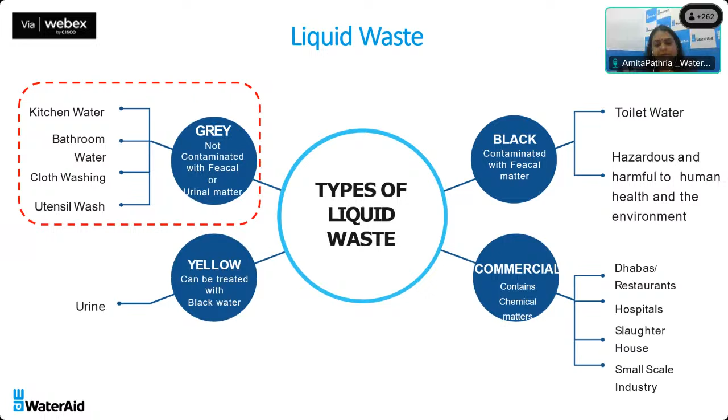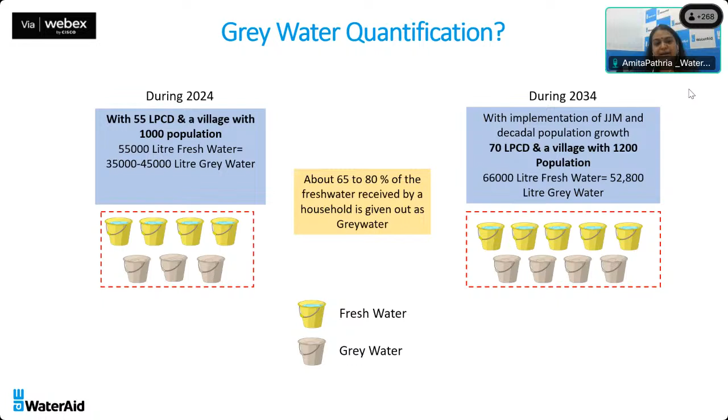Managing liquid waste is crucial for rural sanitation. Population growth and development have reduced freshwater availability and polluted water bodies due to unmanaged wastewater. A holistic approach to wastewater management is needed, turning treated wastewater into a water source. In rural India, grey water and black water are key concerns. Historically, grey water was minimal and manageable at the household level. However, lifestyle changes and increased household activities like bathing and washing inside households have boosted grey water generation. The Jal Jeevan Mission will further increase grey water generation by providing water supply connections to every village and household.

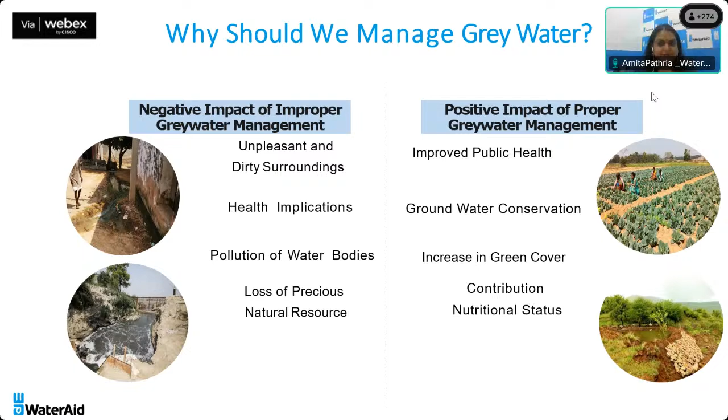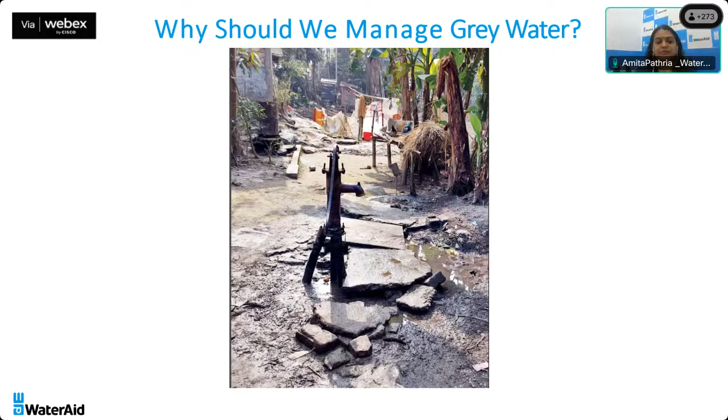Here in this picture, we are looking at a hand pump with a dilapidated platform, and there is water logging there, and an unmanaged situation of grey water is seen, and we see how the environment...

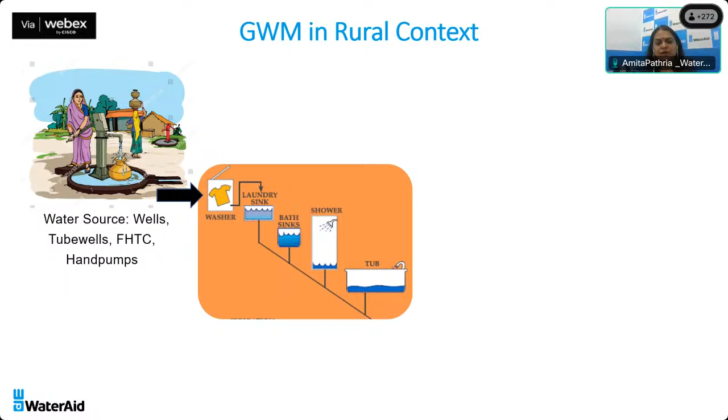So here in the household, these activities happen like laundry, bathing, showering, and kitchen activities. And this water is discharged into either natural water bodies or the environment, polluting the environment.

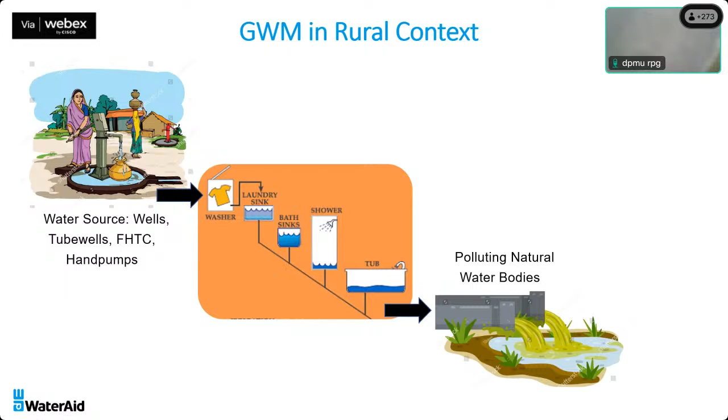So in these pictures, we see what happens to the environment and surroundings when grey water management in rural areas is not managed properly.

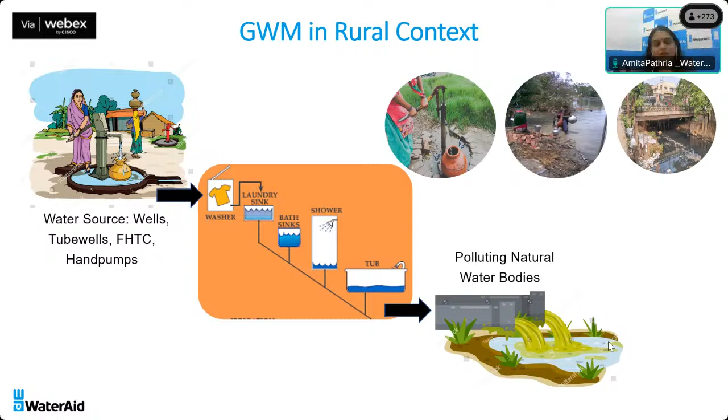So here we see an image where a man is drawing water from a hand pump, and there is a magic pit just beside the hand pump, and the water is collected. Again, the same activities happen in a household.

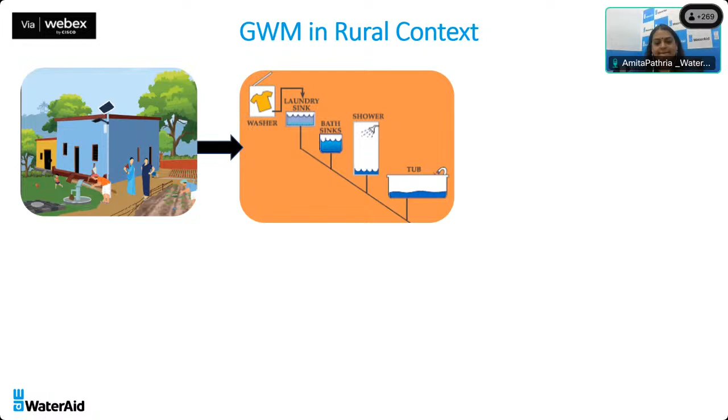Please press 2-3 times. Yes.

So the water is released, and then we advise that there is treatment. We have to decide whether we need to recharge. The first preference should be recharge of the aquifer or groundwater, and then reuse. If we are recharging the aquifer directly, minimum treatment should take place. And if we opt for reuse, then the treatment of grey water should ensure BOD, COD, and other parameters reach levels as per CPCB norms.

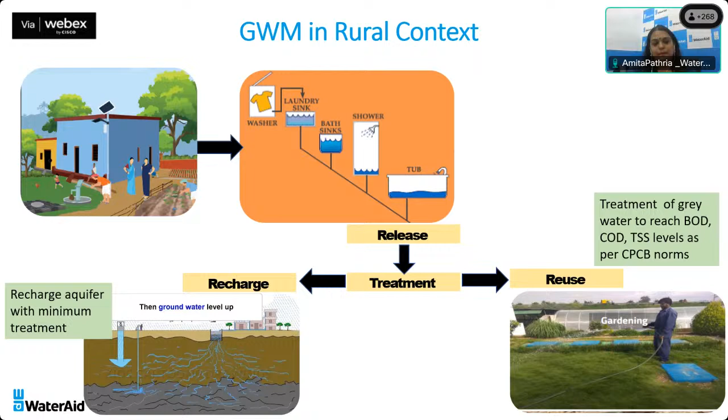So minimum treatment, what does it basically consist of? These are the treatment modules of minimum treatment that I'm talking about.

The first one is separation of solid waste through screening. Next is removal of settleable solids in a settler. Then reducing BOD and COD levels through anaerobic or aerobic process. And then removal of nutrients or pathogens through a polishing pond.

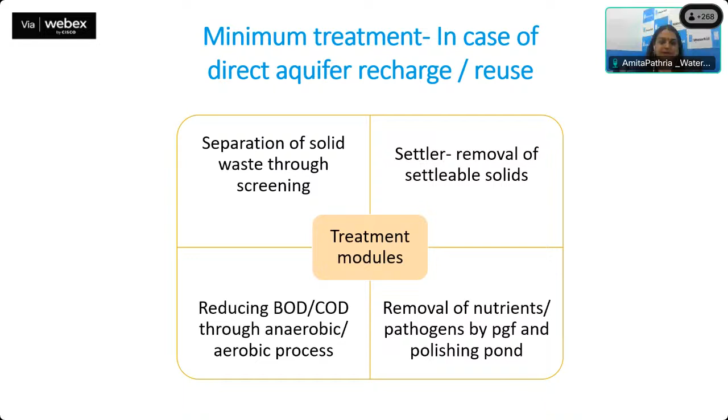Now we are talking about the technology options matrix here, and grey water management can be taken care of at three levels. One is decentralized, which is mostly household level management, where we see common interventions like kitchen garden, soak pit, leach pit. At semi-centralized level, that is community level management, there are two types: one is a group of houses managing collectively, and the other is at public water points, where we see community plantation, leach pit, and DEWATS. And at centralized level, which is at village level, we generally see waste stabilization ponds, DEWATS, SBR.

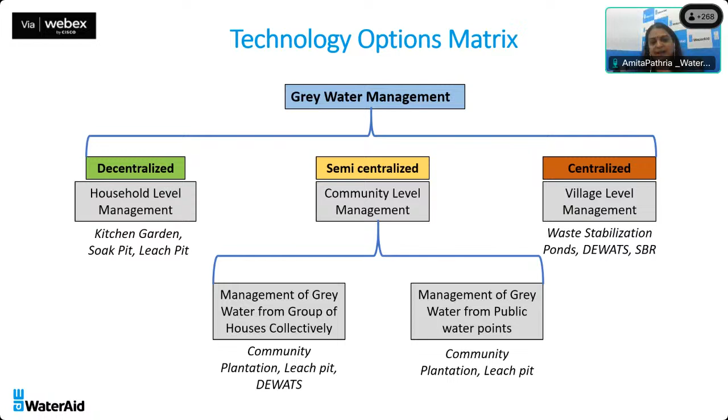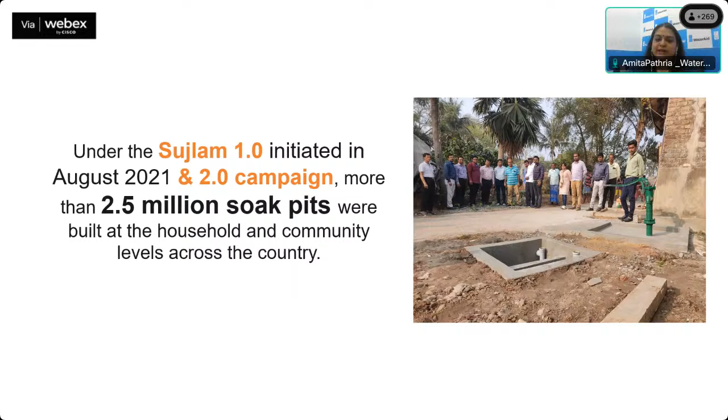So today we are focusing on decentralized systems. Under the Sujlam 1.0 initiated in August 2021, and the 1.0 and 2.0 campaigns, more than 2.5 million soak pits were built at the household and community levels across the country.

And as per JJM, it has been decided that a soak pit or leach pit should be constructed attached to every functional household tap connection or community water point in rural areas, to avoid water and vector-borne diseases.

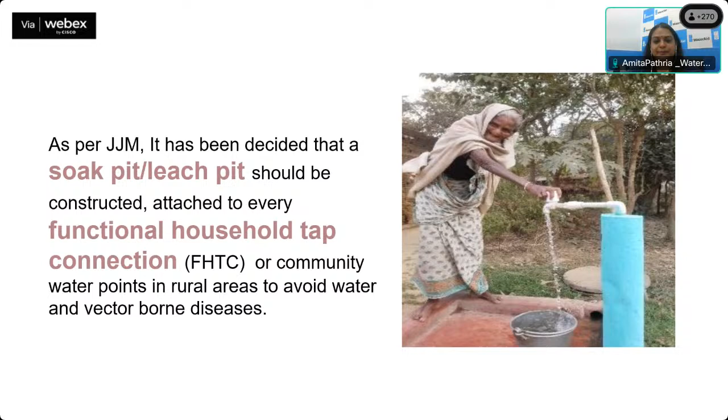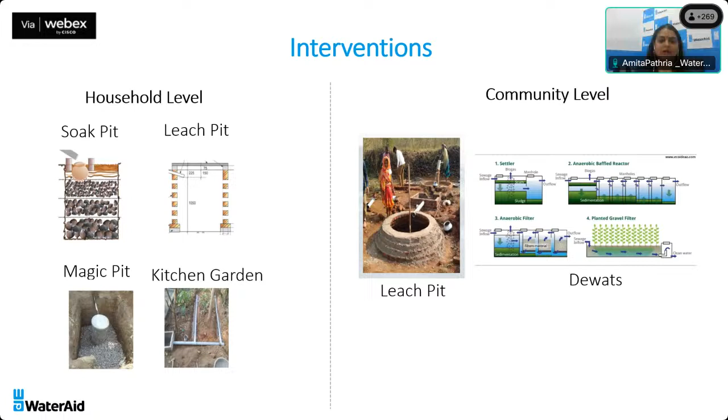We are unable to hear you, please. Am I not audible? No, you are audible. You are able to ask at least. Right, so if somebody is not hearing, then that is a local problem. The previous slide, please.

Let's delve deeper into what soak pit and leach pit systems are. A soak pit is a dugout pit that is filled with graded stones and gravel. The stones increase the...

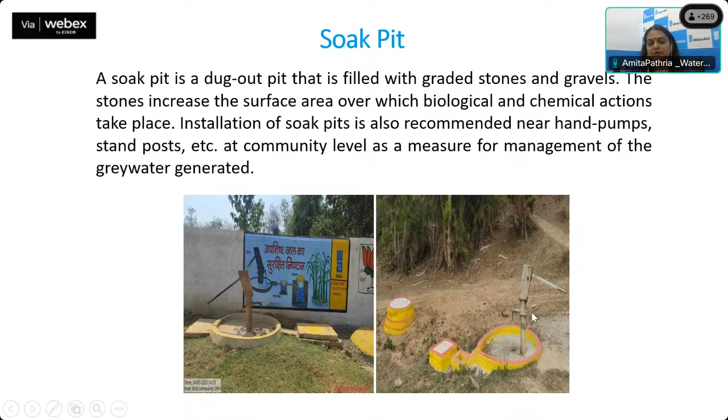Now let's look at the prerequisites of any soak pit. First, what kind of soil type would support a soak pit: good absorptive properties of soil are very crucial for this. High permeability soil like sand is efficient in comparison to low permeability soil, such as black cotton soil, clay soil, or rocky terrain. For site selection, the size of the pit is based on the grey water generated, which is directly proportional to the number of people generating the grey water.

Also, no storm water should enter the soak pit. In low-lying areas, soak pits are mostly unsuccessful. It is not advisable in high water table areas, and also not advisable very near water sources.

Here you see an image, a graphic that shows how a soak pit section looks like. In case of household level interventions, the bottom level of the pit should be at least 1 meter above the water table.

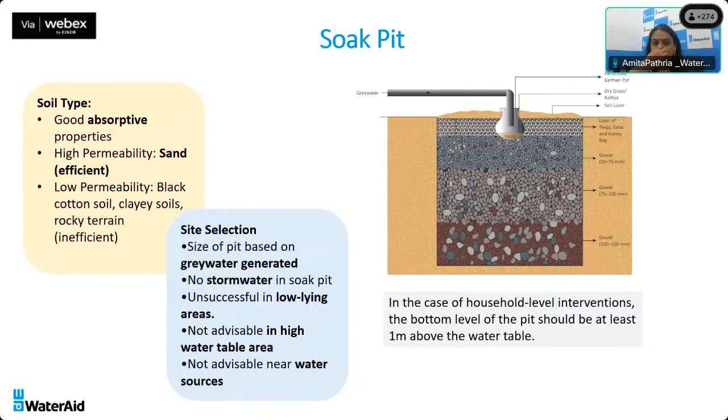This is a community soak pit. The concept is the same, but it's a little different in terms of dimensions. Otherwise, it's the same.

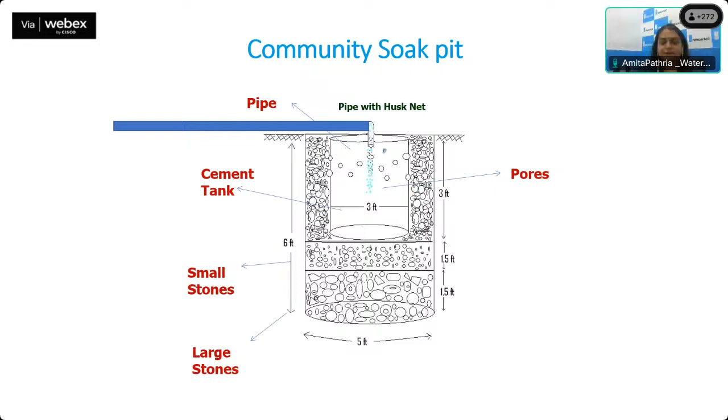So, what are the advantages and limitations of a soak pit? Advantages would be low cost and easy to construct. It can be built and repaired with locally available materials. O&M costs are low and borne by individual households.

Limitations: soak pits handle lower volumes as compared to leach pits. Unlike leach pits, soak pits cannot function in semi-permeable soils. Chances of clogging due to silt in the influent are higher than in leach pits and magic pits. And they are not much suitable for areas with high water table due to contamination risk.

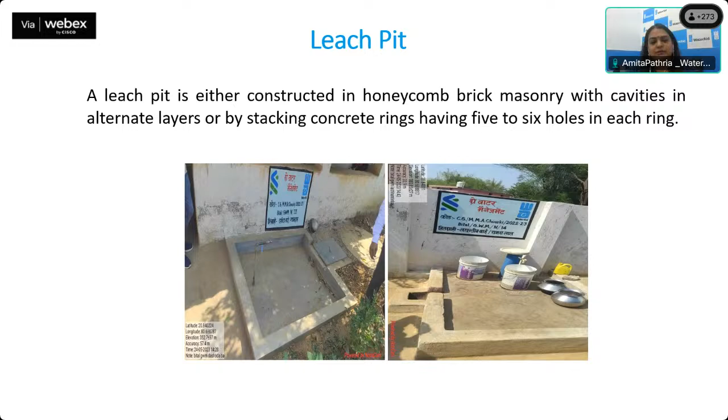For leach pit, the prerequisites would be permeable and semi-permeable soils. In case of clayey soils, 300 mm of sand envelope around the pit is constructed. For site selection, the size of the pit depends on the specific number of people. Stormwater should not enter the leach pit, low-lying areas should be avoided, and it's not advisable in high water table areas or near water sources due to risk of contamination.

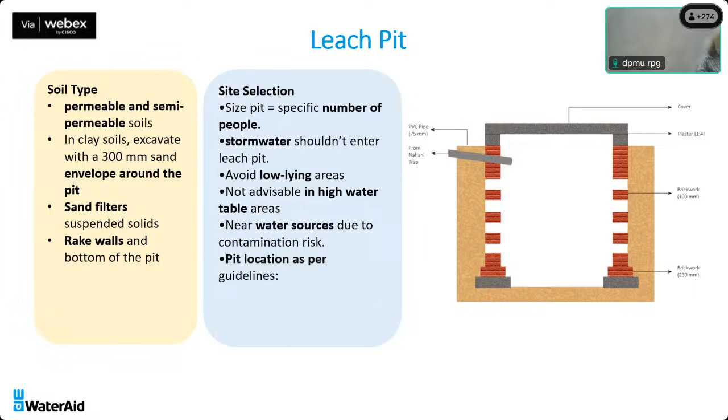Here is an axonometric view of a leach pit. While constructing the leach pit, the portion above the ground, which you can see here, should always be covered.

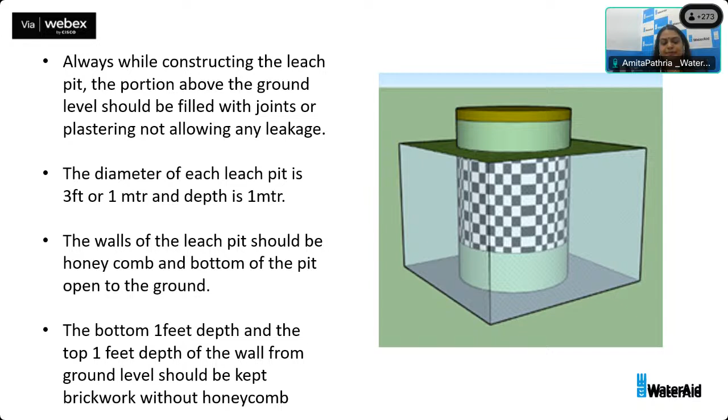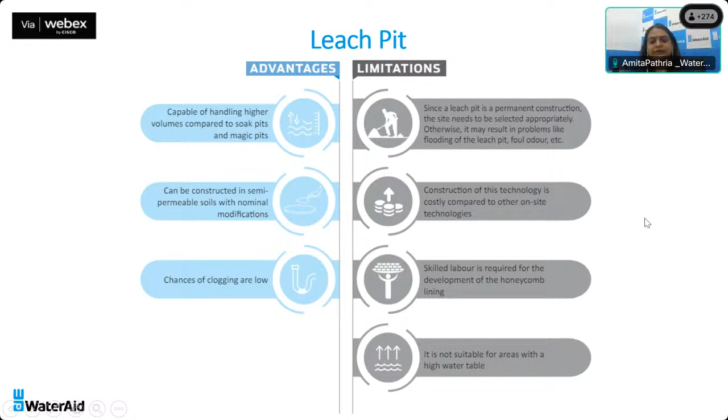What are the advantages of leach pits? They are capable of handling higher volumes compared to soak pits and magic pits, can be constructed in semi-permeable soils with nominal modifications, and chances of clogging are very low. Limitations: since a leach pit is a permanent construction, the site needs to be selected appropriately, otherwise it may result in problems like flooding of the leach pit. Construction is costly compared to other on-site technologies, skilled labor is required for the honeycomb lining, and it is not suitable for areas with a high water table.

This is the leach pit calculation, the size of the leach pit. If we assume a household has 5 members and each person produces 40 liters of grey water, that household produces 200 liters of grey water. In case of a community leach pit, one leach pit serves 10 houses, so grey water produced each day by 10 houses is 2000 liters.

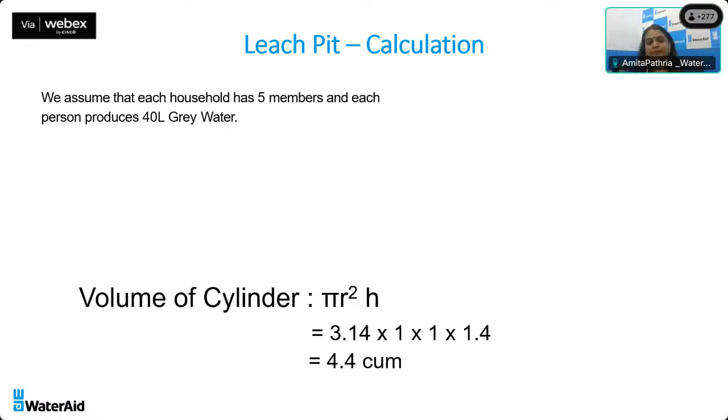The appropriate volume of the leach pit must be doubled as per standard. So if 2000 liters of grey water is produced, we assume 4000 liters of grey water has to be treated, which counts to 4 cubic meters.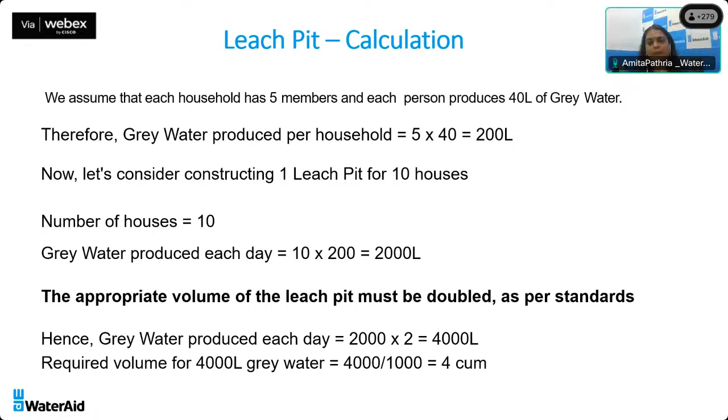We assume each household has 5 members, so in that case 4 cubic meters of volume of leach pit is calculated. As per standard, the diameter of a community leach pit should be 2 meters and the standard effective height or depth should be 1.4 meters. So as per the calculation, the size or volume of the leach pit would be 4.4 cubic meters.

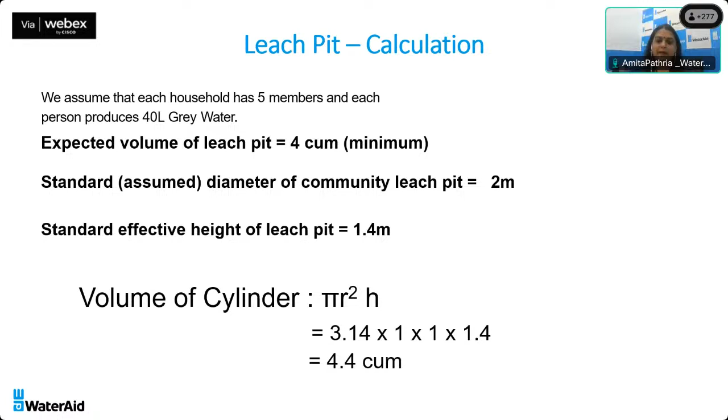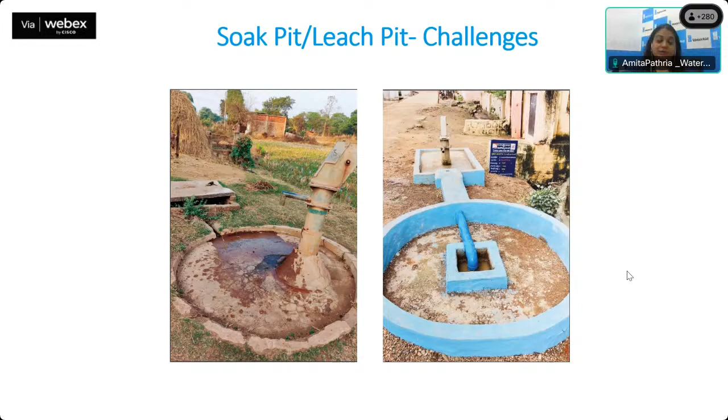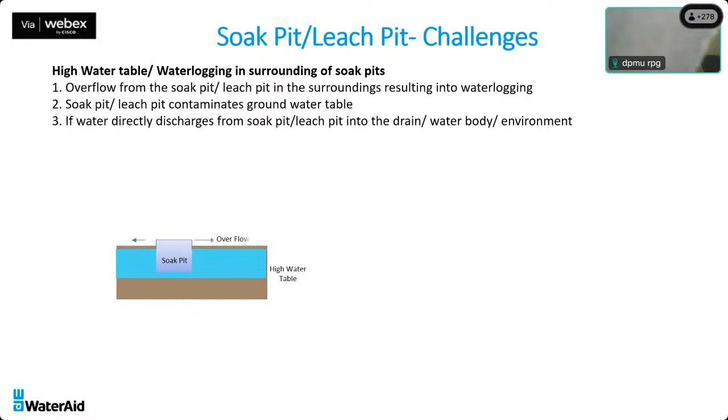The first situation is high water table and water logging around soak pits. If there is a high water table area, permanent or temporary water logging, or a flood prone area, overflow from the soak pit or leach pit into the surroundings results in water logging. The first figure shows that if a soak pit is constructed in a high water table, there is overflow and contamination of the environment. The second figure shows a soak pit in a high water table area contaminating the groundwater. If water directly discharges from a soak pit or leach pit into a drain, water body, or environment, it contaminates the same.

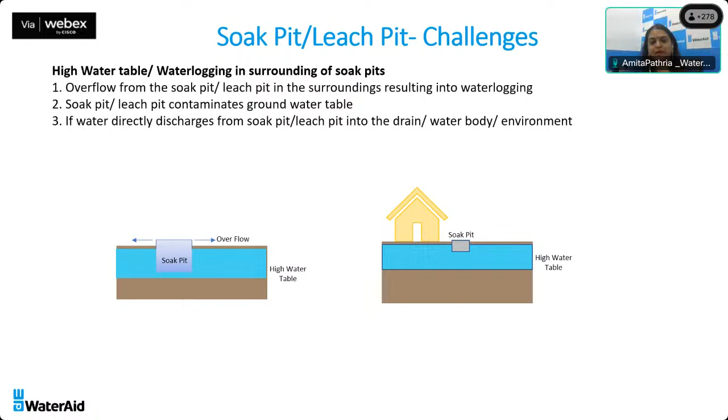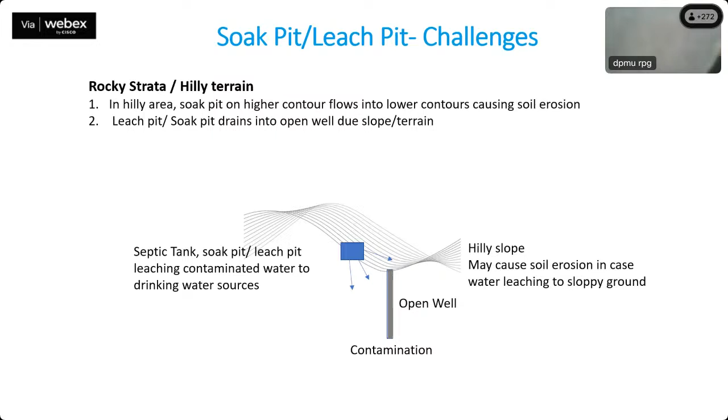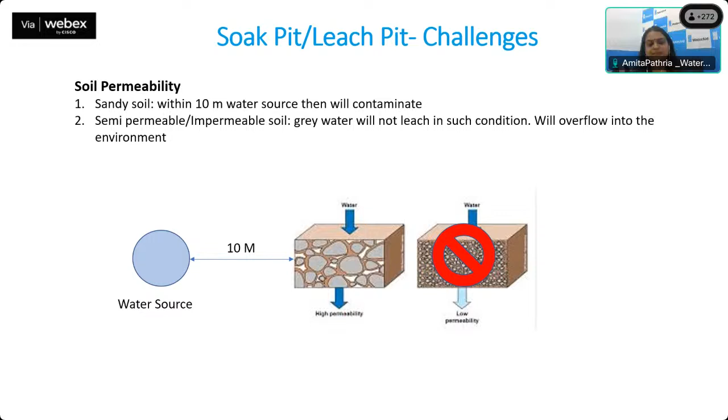The last one is faulty technical design. There can be many faults in the technical design of a soak pit and leach pit.

To list a few: no honeycomb design in the leach pit, improper construction of the RCC ring or brickwork, and if there is no soak pit cover, then stormwater can enter, leading to mosquito breeding and related environmental and health problems.

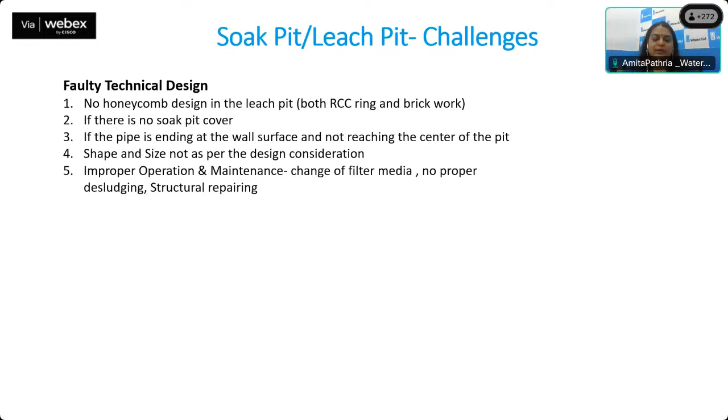If the pipe ends at the wall surface and does not reach the center of the pit, it will hamper the side wall of the soak pit. Also, if the shape and size are not as per design consideration, because the mason is not properly trained and has not calculated the size of the soak pit well, there will be problems with the shape and size of the leach pit, affecting its functioning.

Then there is improper operation and maintenance. For example, if the filter media in a soak pit is not changed or revamped, then there is a problem.

Now I will hand over to Purna.

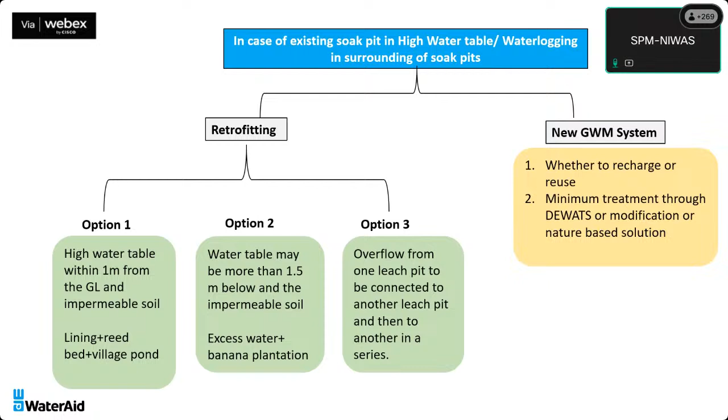So far, I will give a flashback, then we can go ahead. We have discussed how we can construct the soak pit or leach pit. We have taken up massively the soak pit and leach pit implementation through our programs in different areas, starting from the household level to the community level, near hand pumps, clusters of houses, and other areas.

If you look into those things, we are finding that in most places in the rural areas, leach pits, soak pits, and magic pits have been constructed. There are other technologies, but we can take those up in other sessions. Right now, we are discussing the challenges of the leach pit and soak pit.

As Amita has shared, the challenges relate to waterlogging. If the area has waterlogging or a high water table — the water table may be within 1.5 meters, or around 5 to 6 feet or more below ground level — and the area is disaster prone, these become constraints.

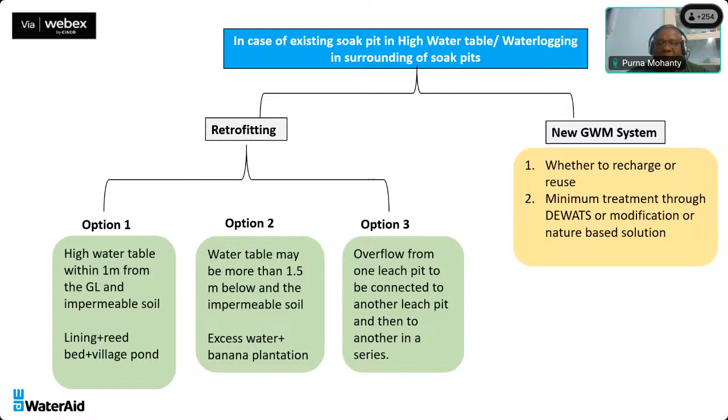Can we go to the next slide, please? We will also show you the diagrams. So following the text, let us go through it, and then we can discuss the diagrams. Can you go to the next slide, please?

Now let us discuss the area having rocky strata or hilly terrain. As discussed, in case of rocky strata or hilly terrain, if we construct a soak pit at a higher altitude, there is a chance it may contaminate a drinking water source at a lower altitude. Also, if the ground is sloped, leaching water from the leach pit or soak pit may create slushy soil, which contributes to erosion. So in that way, we should go for plantation and other measures.

So the option can be: the bottom of the leach pit or soak pit can be lined to make it a kind of containment or settler first, and following that, in the next phase, the water from the leach pit or soak pit should pass through a reed bed.

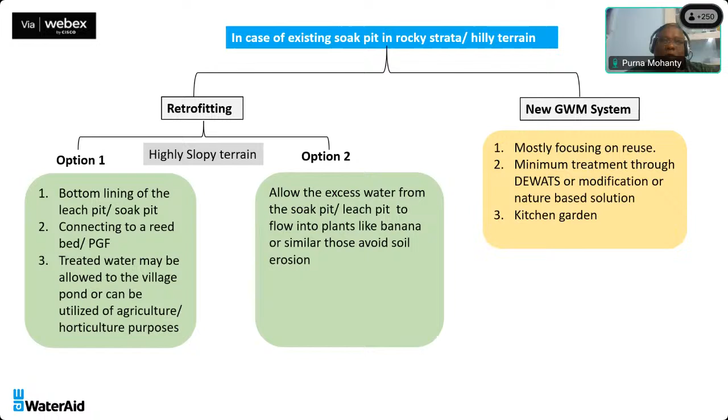After that, the treated water can also be allowed to recharge into the village pond if there is a water body, or else we can pass it through the stormwater drain existing in the hilly terrain, so that it will not further create contamination at the lower level.

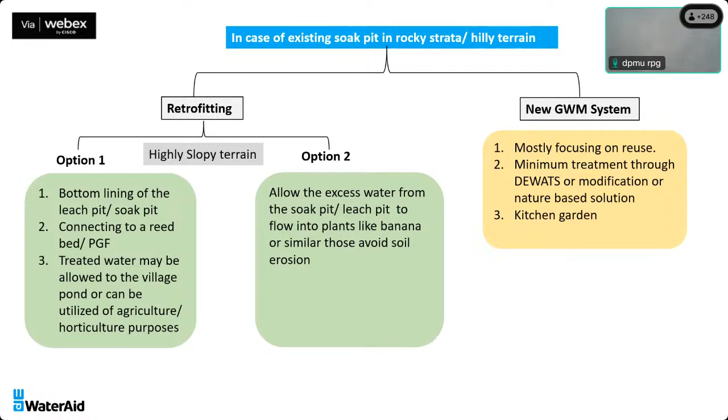Next, let us discuss the third case: whether the soil is impermeable or permeable. We may find permeable soil or soil that is impermeable or semi-permeable. In case of permeable soil, it is fine if we construct a soak pit or leach pit appropriate to the terrain, as it can recharge down to the ground level.

But one constraint is that if there is a drinking water source nearby, within a 10-meter radius from the leach pit or soak pit, there is a chance that water flowing from the leach pit may contaminate the drinking water source. In that case, we will have to restrict any drinking water source from being constructed within the 10-meter radius of the leach pit or soak pit.

If it is constructed, we will have to line the side wall so that leaching may not happen directly to the open well or drinking water source or similar structures. We can create a barrier underneath the soil to avoid direct leaching, and by that protect the drinking water source.

Otherwise, we can use that particular water source for other domestic purposes, and safely construct a new drinking water source at a distance of more than 10 meters from the leach pit or soak pit.

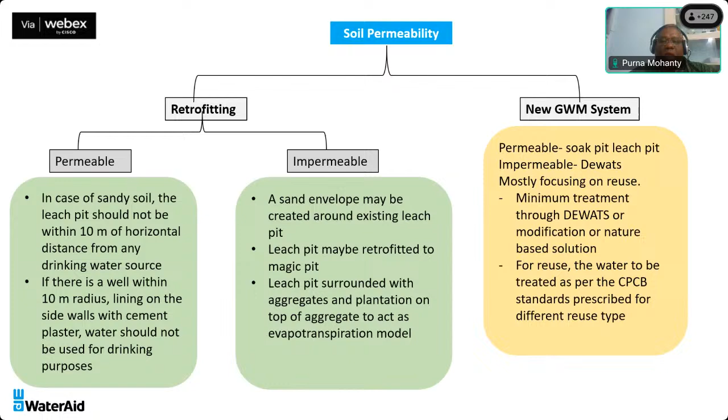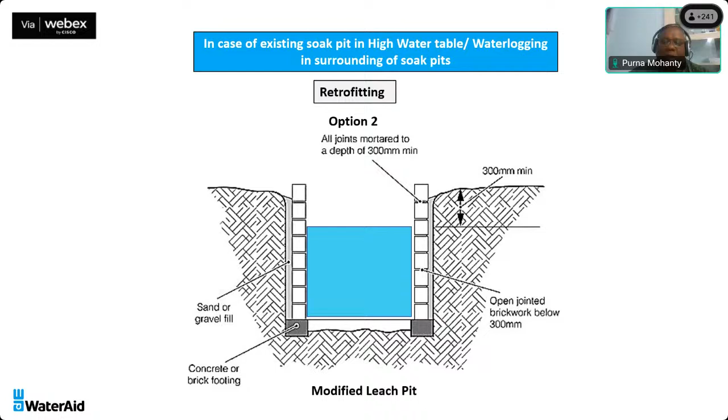This is a modified leach pit. If we already have a leach pit constructed, we can create a surrounding envelope by digging out the impermeable soil, putting sand or permeable soil within the strata, and planting banana plants surrounding the soil.

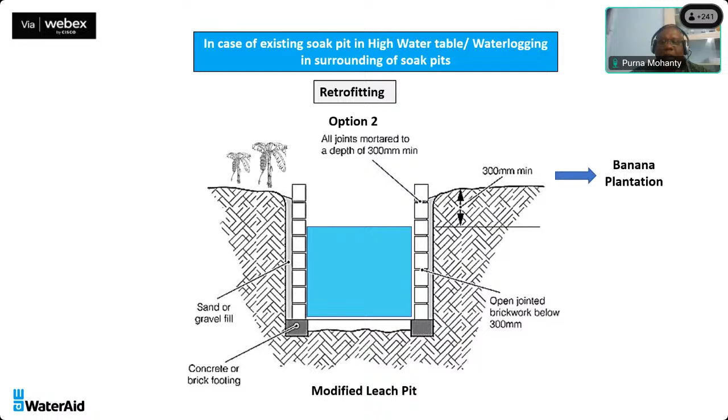These are all banana plants; we have made an animation to show this. Accordingly, we can treat and modify the leach pit into this modified form.

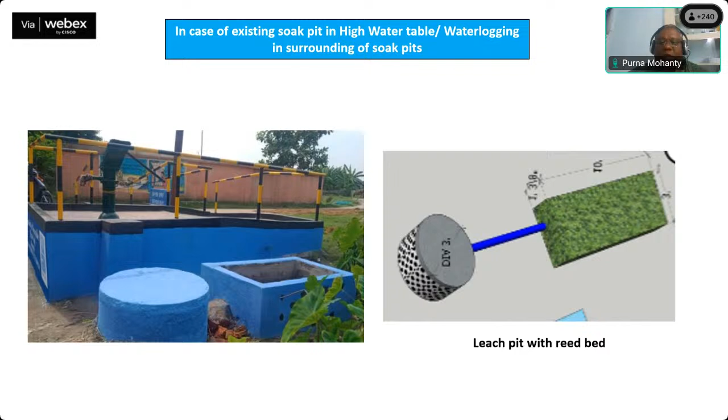This is another attempt we have made. This is a leach pit constructed, and adjacent to it, water from the leach pit flows to the reed bed. In the reed bed, water flows horizontally, and plants there take up nutrients while the water gets filtered. The treated water can then reach nearby areas or be used for agricultural purposes.

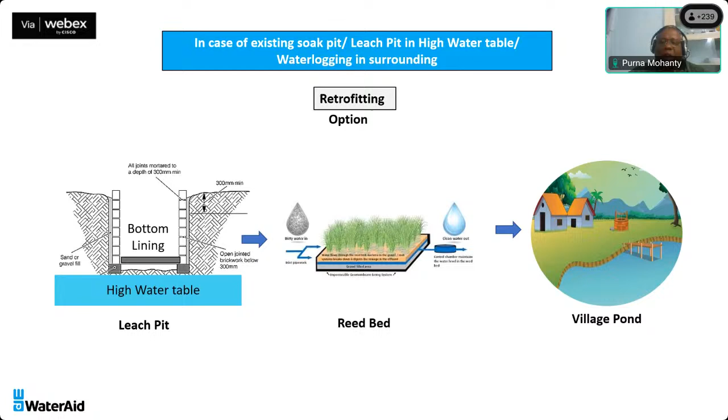So we have already discussed all these models, and I'm just showing it in a diagrammatic way. This is an already existing leach pit. If there is an overflow, it can come to the reed bed. Allowing the water to the reed bed, treatment happens there: BOD and COD rates are reduced, and pathogens are arrested. The treated water can then reach the village pond without contaminating the existing water body further. It can also be used for plantation purposes. Next, please sir.

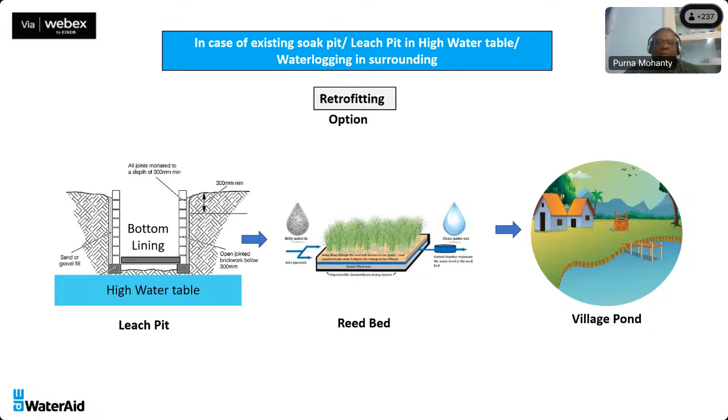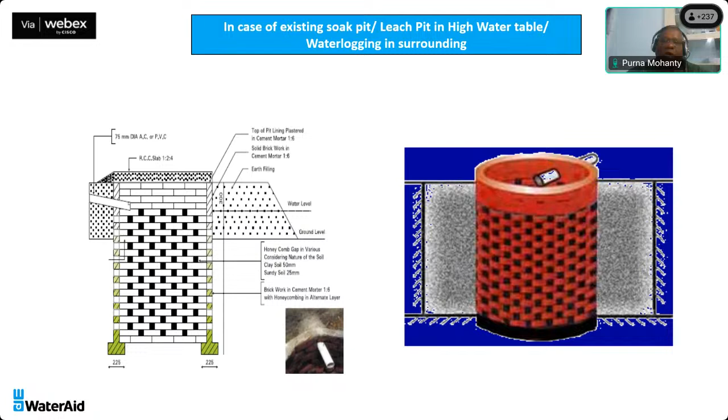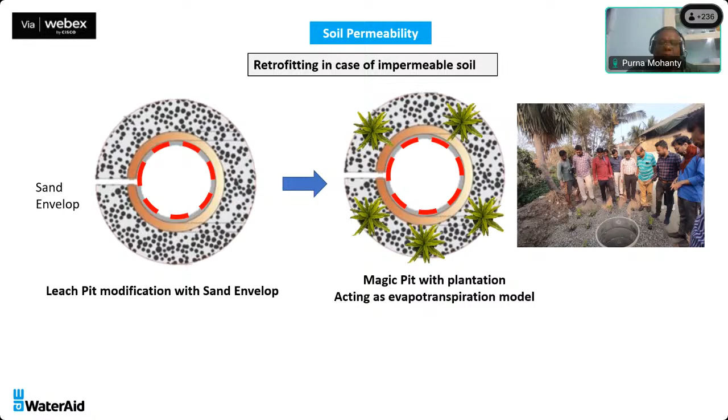We can also take up plants on the soil, so the topsoil can support a kitchen garden or similar plants. So we are trying to share some thoughts and insights on how we can retrofit the leach pit or soak pit already constructed. But...

In the same way, we should also consider safe construction practices. If there is a faulty design or repair required for an existing construction, we should address that. If taking up new construction, we should design the leach pit safely according to the volume of water, as already said, and also consider operation and maintenance. In a soak pit, if soaking material is inside, we should clean it periodically. In a leach pit, we should remove the sludge or solid deposits periodically so it remains effectively functional. For plantations, we also have to periodically check the plants and replant so the evapotranspiration process remains effective.

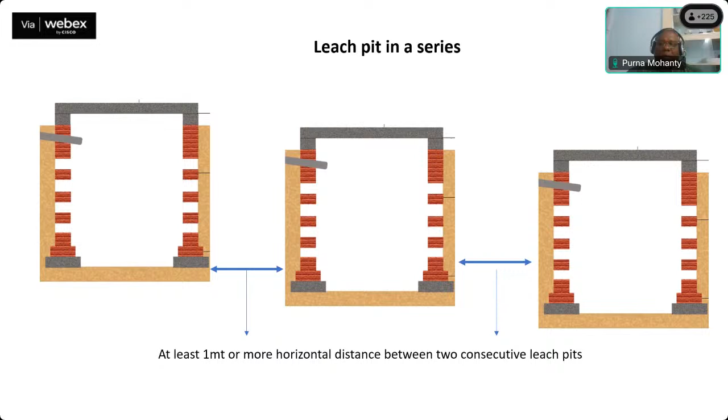Sir, can we go to the next slide? I think we can roll back through the last few slides, one by one, and continue the discussion. If any member from the audience wants to share their thoughts, or has any agreement, disagreement, or comments on all those options, solutions, or challenges... Yes, it's a good presentation, very good presentation indeed. There are lots of questions, with setbacks and otherwise. I think now we can start the interaction session at least. So let us stop the slideshow, and we will discuss them better. Okay, sir.